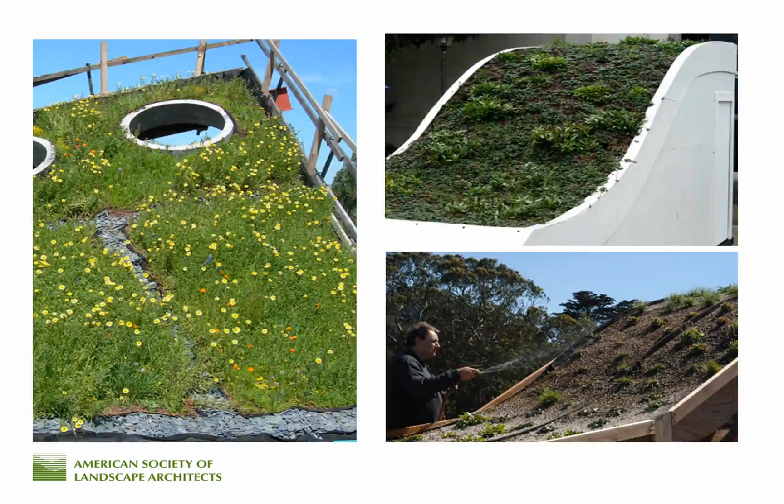California Academy of Sciences with Renzo Piano, we still enjoy a great working relationship with Renzo. We're growing some 7 acres of tea production on commercial buildings in Hangzhou, China. And working with their team is always really a beautiful experience. And Renzo is known for his transparency and his light and architecture.

The California Academy of Sciences had the goal of explaining and exploring the natural world. And they had some 10,000 organisms in the basement in catalogs. And I said, well, wouldn't it be wonderful if we could demonstrate biodiversity and sustainable design and make this as part of the exhibit, the building and the roofs? And Renzo asked me, Paul, can you retain 6 inches of growing media on a curvilinear slip plane in the climate of California? And of course, I walked in and said, okay, yes, we can do that.

And developed some interesting mock-ups, full-scale mock-ups, and this has been a big part of our practice, since we're often asked to do things that haven't been done before. We always put mock-ups into our program and into our design phases, and we learn so much, and the purpose of these mock-ups are really to look for all the ways they can fail. We're not interested in trying to skew these results so that the client can see what great work we do. We're looking for all the things that are left out and all the things that could fail.

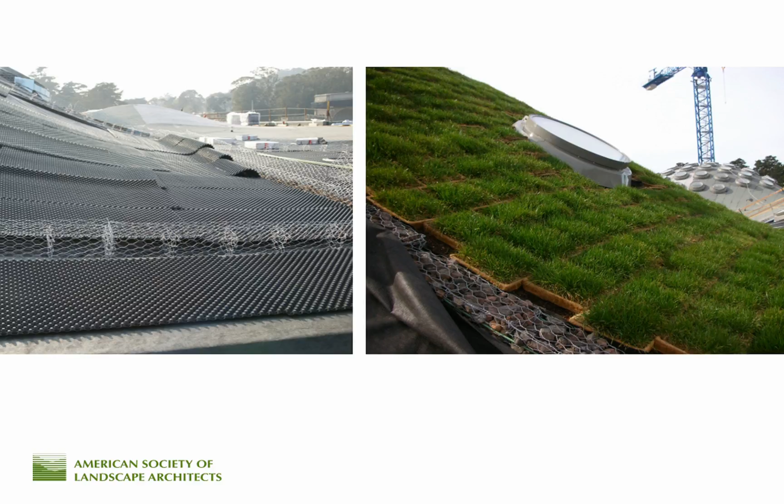But since then, over the last 8 years, the Academy has planted well over 100 species of plants, and the research that's been done indicates there's 86% greater species abundance on the roof than on the ground plane in the park, and 36% of those species aren't found in the park.

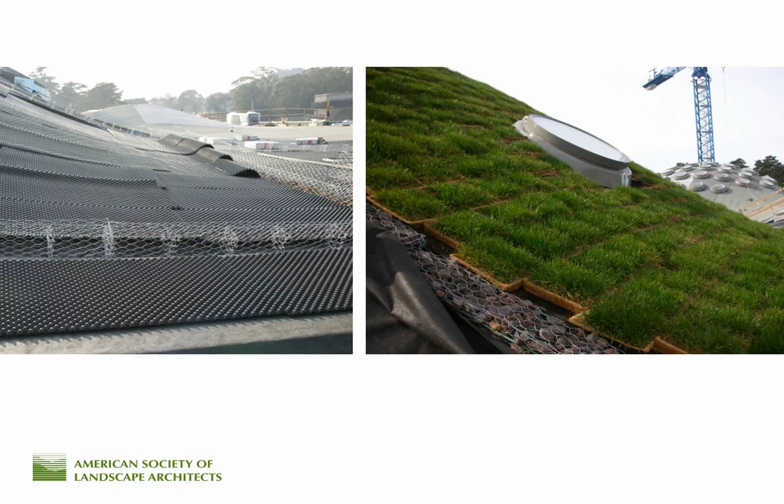So somebody asked me, what good are these little sustainable ecologies within a 500 square mile area? And they're as good as what they're connected to. And this idea of connectivity and looking for adjacent ecologies is really very important to our work. We look at migratory species, we look at hydrology, we look at all those things that can enhance the productivity and the performance of these systems. That's a little bit about who we are.

And Marta, you want to take over again? Sure. And you know what, even though I'm a millennial, I'll let you take care of the clicker.

Our nursery is my love, and we really have grown it to meet the need of our projects, first off. We are growing a lot of plant material for our living roof and our living wall projects, and now for a lot of our commercial and residential work. And the nursery has always been a site of research and testing where we can really understand the plants that we're trying to grow.

And now I would say only 30% of the plants we grow are for our own projects. Through our relationships, we've started to offer our contract growing services to a lot of the contractors and landscape architects that we work with, and we're able to provide, which I think is something that's really necessary in the nursery industry, one grower who can provide all the plants you need on time for a project.

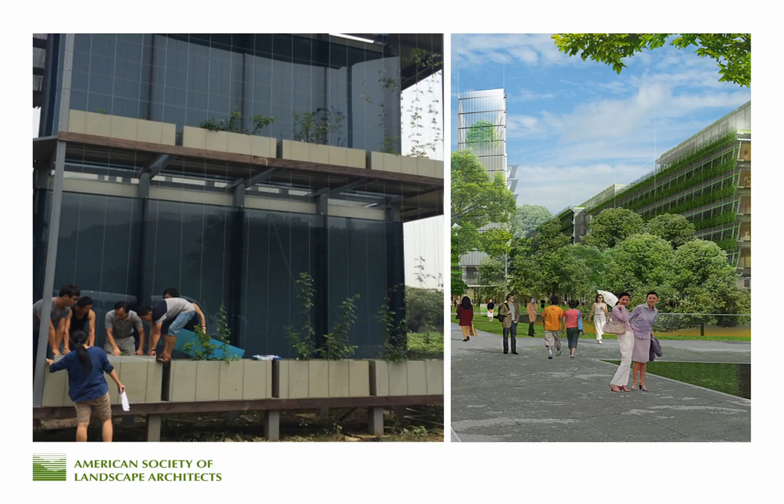Thanks, Paul. Let's see if I can make this work. Yeah, you really have to aim it. Oh, there you go. Oh, that's the wrong way. Wrong way.

This is just more examples of what having the nursery can do for us, and being able to use it as a testing ground. This is a slide of our install crew doing a living wall. And now we're at recent work.

So we're gonna kind of jog through a bunch of projects and talk about the most interesting and exciting parts for us personally. And this one, I think we all really love this project. It's a local project, and it's a really massive project. And we wanted to show this project first because it demonstrates our vertical integration.

So in this particular site, we went from collecting seed, growing plants, planting the plants. We did the whole design, the irrigation design, the planting design, the whole thing. Performance standards, monitoring programs.

So this dam was built in the WPA era. It was built for storing water. It's on the Carmel River, about 25 miles east of the coast. That slide that Paul showed at the beginning of the nice beach scene, that would be the outlet of this river. The Carmel River is a critical habitat for steelhead, and that's an endangered species in California, Oregon, Washington.

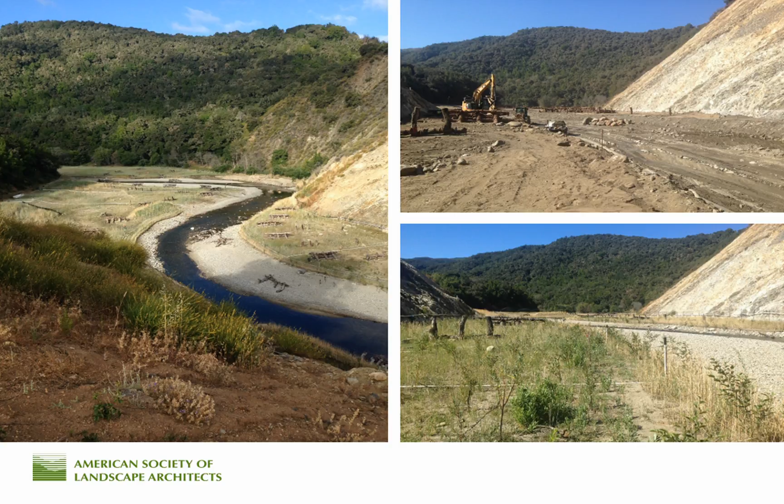And one thing that was a little bit, I'll just move the slides along so we can get some other pictures while I talk. This is nature, it's hard to tell, but nature took over. Yeah, this is a challenge slide.

After we completed the project, or we were getting close to completion, I'm a weather nerd, and we started to hear about what was going to happen in California this year with El Nino. Largest El Nino, potentially the strongest forces, the most warm water in the Pacific. It didn't actually come to fruition, and we're very thankful for that because it could have been a very big challenge.

This was a 1.5-inch storm that came through, and it side cut the river channel, and it's hard to tell when you don't have context, but that's what's happening there. Those were engineered step pools for the steelhead to migrate and resting pools on their way upstream. Most of it remained intact, but it did wash out a whole chunk, so that had to get fixed. And I think as the plants have stabilized, the whole system has stabilized.

Here's a slide of the dam scar. I love this. It was interesting that they chose to leave the dam scar. I'm glad they did. It was sort of controversial, but I liked the reminder of what was. This is a good shot of the step pools before the vegetation is grown in, just allowing the steelhead to come in and rest in the pools and move up. Nice panoramic of it.

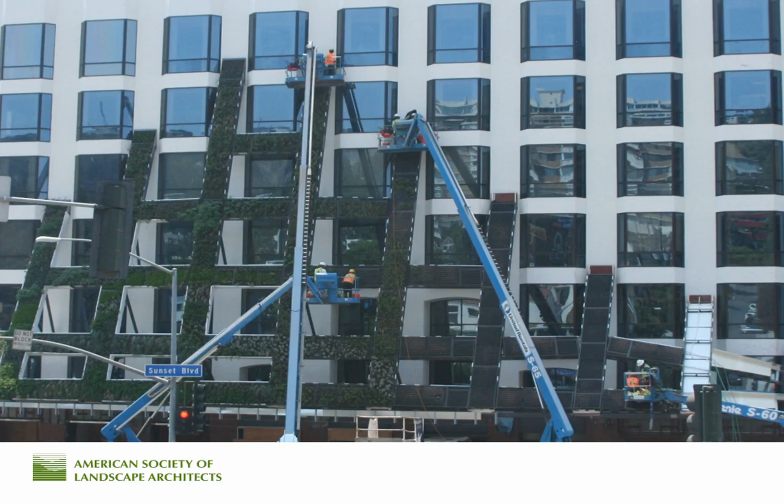These are all guys that work for Rana Creek. They were working 10 to 12-hour days for about 6 days a week. So that's kind of what it looked like after everything had grown in. And we're still currently maintaining it. And the client says, can we change the color of this plant material over here? So we'll go in and tear out some plants and put something else in.

And a real interesting part of this project is the water story also. And Blake worked a lot on that, so I'm going to turn it back over to Blake to talk a little bit about water. Sure, yeah. When Paul and I visited the site, the architects that we were doing the site visit with mentioned that there was some water that might be available that would be non-potable. They were vague, and they weren't even 100% sure what that looked like.

We were in the basement checking out where we'd be putting controllers and equipment, and this pipe you could hear just hanging from the ceiling, just running water, like a 6-inch pipe just gushing water. And we're like, where is that coming from? The building manager provided all the records, and it was 8,000 gallons a day of dewatering water from the basement. So we're like, well, what can we do with this?

And they had an NPDES permit to dump the water. And that kind of raised a red flag for us. It doesn't seem very likely that we could modify the NPDES permit in order to actually use it. We looked through the water scans and the data. It was super clean. It's probably the cleanest water in the LA basin. There's just an underground river running underground there.

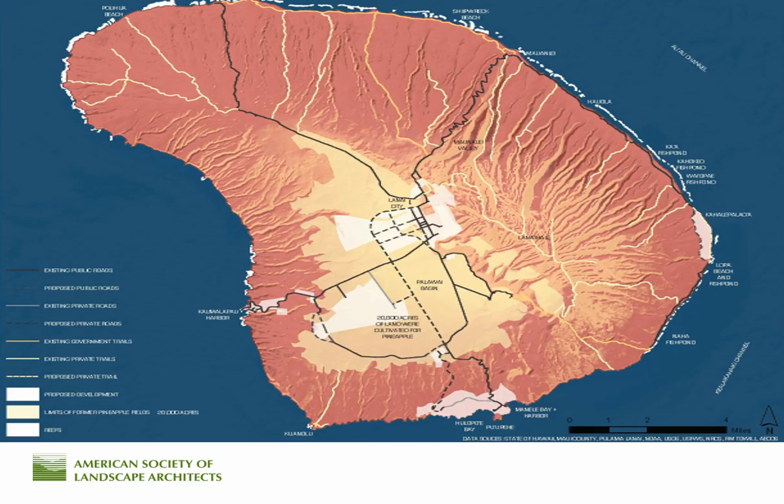There's so much. We flew in one time right after a storm, and the ocean all around the island was just reddish brown for miles out. Yeah, it's destroyed the fishing ponds that were built by the indigenous peoples. The coral reefs, the fishery is in collapse, and it's many factors, the farming, but also the introduction of a deer. Yeah.

So the hydrologic story here is critical to understand, and it is very complex, but I'll try to get to the crux of it. 40% of the water that ends up on the island is actually coming from fog. The Lanai Hale, the little peak there, is where the clouds pass over and condense as fog drip, and there's vegetation up there on the top that is adapted to collect that water. But there are 16 to 30,000 invasive axis deer on the island, and they love munching on all of those ferns and things that catch the water. So that's really where the erosion is terrible.

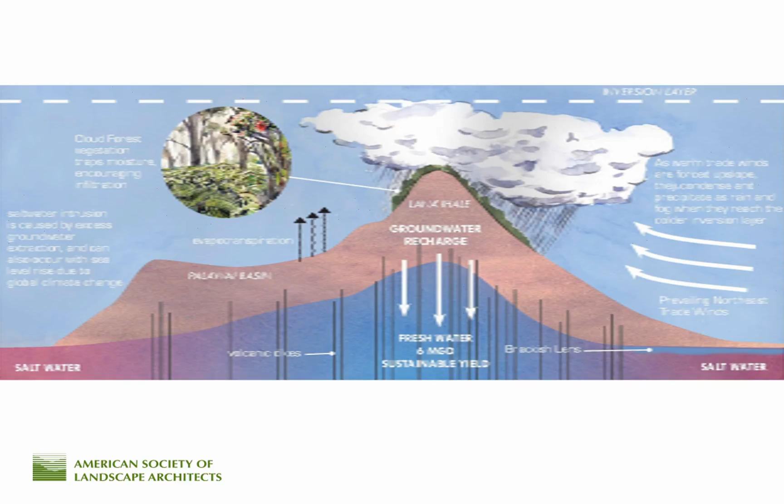And if I can just interject, I think the issue of the deer is incredible. We were looking at herds of 600 deer in one herd. I think there was a population of over 30,000 axis deer, all introduced species, wreaking havoc on a tiny island environment. Yeah, and still are. So management of the deer was one of the initiatives. This is not landscape architecture, but we got ourselves in this position where we had to figure this out. They wanted us to take the lead.

So we talked to the FDA, the different agencies, and the agricultural extension, which was hugely helpful. We had a symposium with them, and they provided a lot of support and made the right connections so that we could develop a plan for a mobile abattoir and a refrigerated truck. The truck drives around with the hunters, and they take down the deer in a humane way that's certified by FDA, hang them up in the pickup truck, and after the night of hunting roll them onto that big van, where the entire breakdown process happens. What you get at the end is delicious meat that could be sold on the island or served at the restaurants, and reduced erosion eventually.

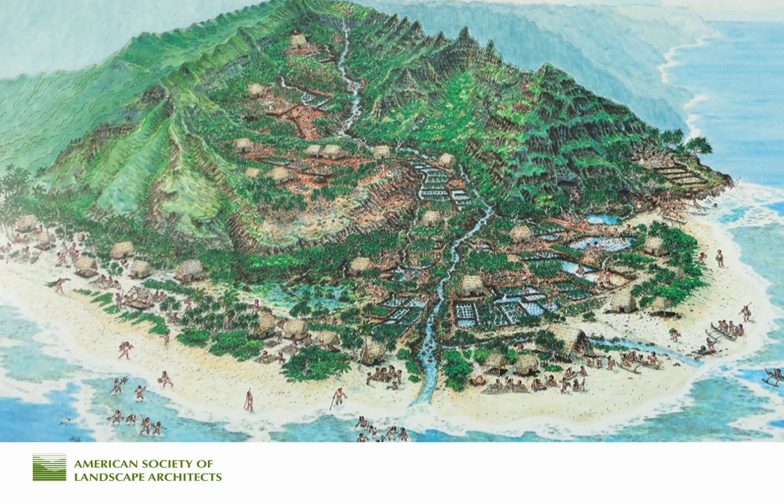I want to interject here for a minute. I know we've got a short period of time, so we'll try to move through this quickly.

The island mainly wanted to be totally sustainable from a food production standpoint.

So one of those concepts was to go look back to historical agriculture on the island, which had a lot to do with agriculture, aquaculture, growing taro, and creating a system where you are using the fish, the poop, and the non-consumed food to provide nutrients for the taro fields.

So we looked into that, and we worked with the agricultural extension to develop a system that kind of does that, and the idea is that this is growing all the greens for the restaurants, and this would be replicable and expandable. And the idea here is we would not only grow fresh vegetables, but also indigenous species for revegetation.

And the metrics here are interesting. There wasn't any financial gain in the fish. The payback, the ROI, was in the fresh food. About $41,000 an acre to the farmers that could participate. And this was critical on an island where 99% of the food was imported.

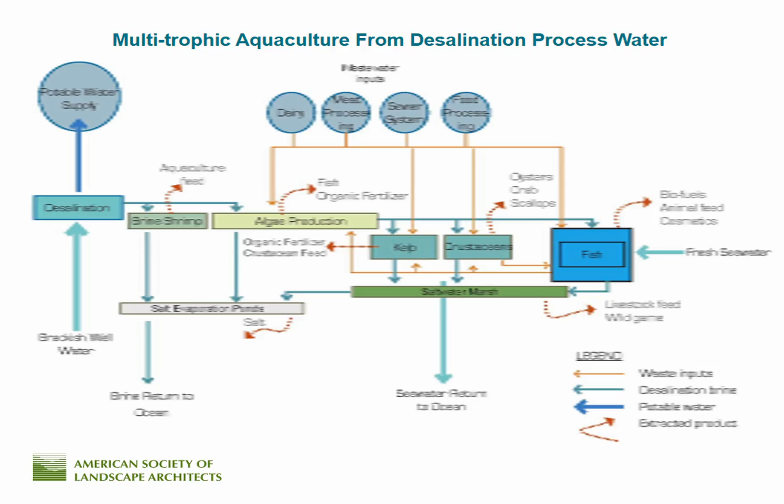We took it a little further with some big idea thinking on how we could take more of the waste stream on the island and apply it to how we could do more. We're accessing a lot of research that the University of Hawaii was putting together, but that's just kind of dreaming.

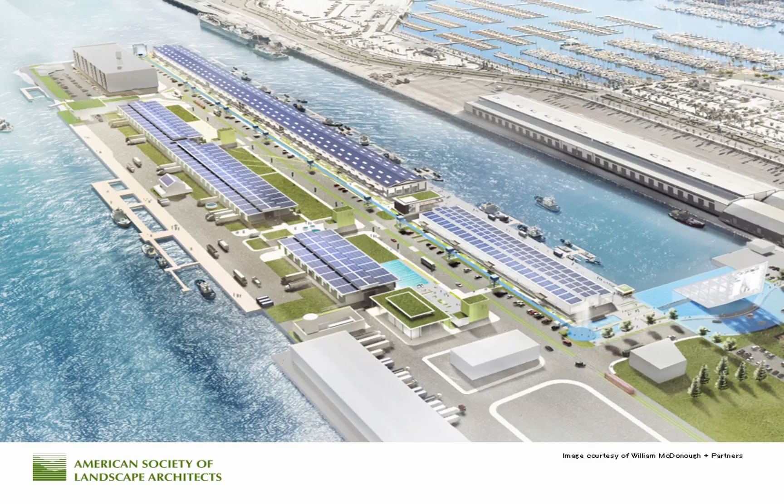Next one. Bill McDonough's project in AltaSea, again, one of those multi-trophic ecological engineering projects, and also looking at adaptive reuse of a historic warehouse and creating a new research facility for 7 campuses in the LA Basin. And 20 campuses. We had the mandate of developing a zero runoff site and high event rainfalls near shore.

And our goal, thinking along the lines of Bill McDonough, was to do more good. So not just get to zero runoff, but what could we do with the water, the wastewater and the stormwater? This is a mile-long pier in San Pedro. Most of that building is an existing building. And it's pretty much where all the bananas were at one time housed and ripened before they shipped out to the rest of the country.

So this whole thing is designed to be a world-class aquarium where people can go and visit and learn about the aquatic life, but also intensive research. All these different schools would be researching here. And what we really focused in on was the water system and how we could take advantage of the nutrient stream from the aquariums and from the rich seawater that was right there being pulled in. The seawater system would be a 1 million gallon a day system. So there was just a ton of nutrients that could come through that.

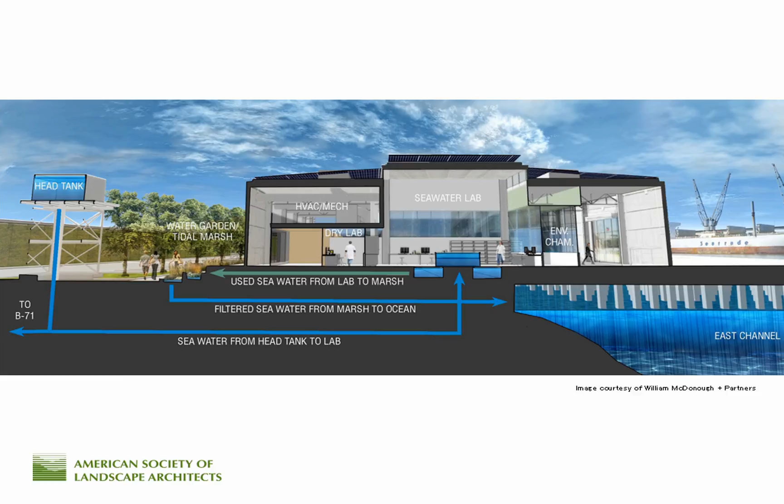And we evaluated whether we would use freshwater marshes or saltwater marshes and integrate them into the landscape. It was a really fun project, master plan level, but really fun to try to figure all this stuff out and work closely with the seawater engineer on how this all could potentially work. These are some diagrams that describe the different ways that we would be entraining those nutrients. We talked about growing

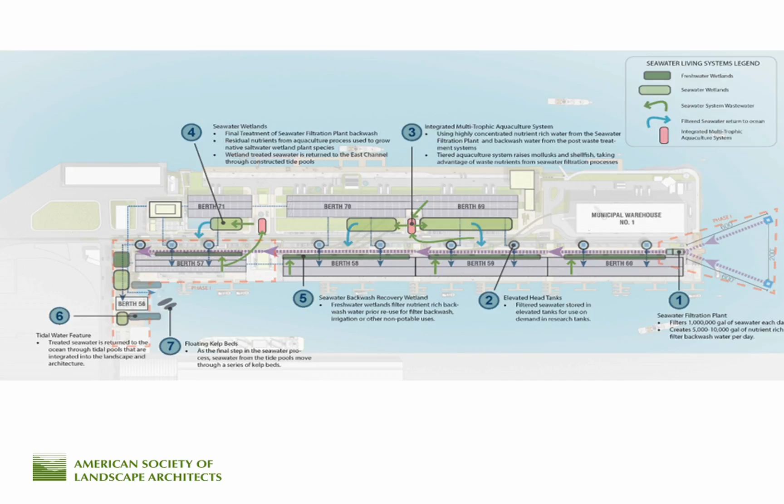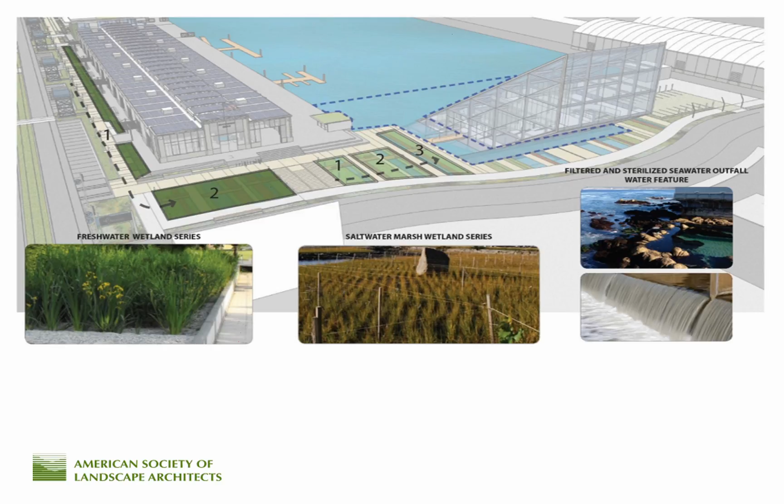mussels on lines, and what was really interesting is that, talking to the researchers, we had a meeting on site with them, and the researchers got really excited about the wetland opportunities, and all of a sudden the program changed. It's like, okay, well, part of this will be demonstration, but a lot of this is actually going to be research, little opportunities for research. So that was a really cool thing that came out of that. More conceptual ideas about how the space would be laid out.

Yeah, I'll just go real quick through this. Just finished a 9-year project with Ken Smith Workshop and Grimshaw in the Bronx, and the big idea here was to take a 3-story hole in the ground that's treating 35 to 40% of the drinking water for Manhattan and integrate it with the existing golf program of Van Cortlandt Park, and also entrain all the stormwater and the runoff from the living roof in circular wetland treatment cells that go around the perimeter, not only to provide the wetland and water treatments, but also to create a secure area so that people don't have access to the plenums on either side. Those are the big vents.

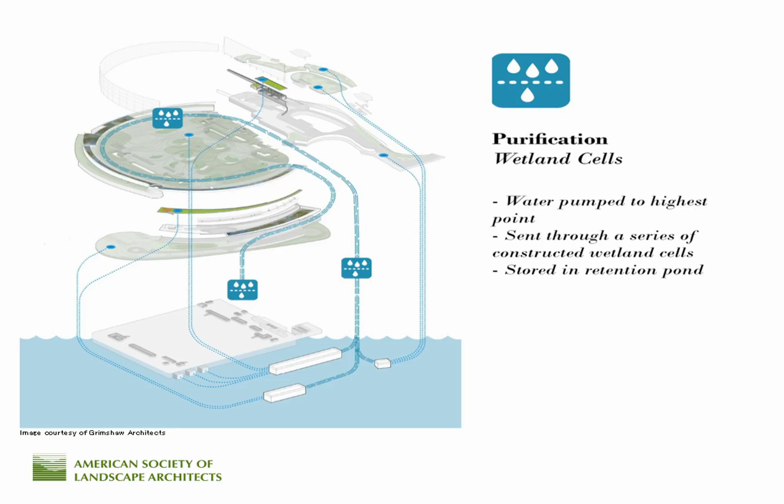And this has been a very complex project and a large-scale project, and when we got into the excavation, we found 4 artesian wells that contributed about 55 gallons a minute with some very high levels of chromium in the water. And so in the wetland cells, we changed the residency time, the treatment type, and isolation cells in order to clean and purify that water. It was material intensive, and one of the hardest things about a project of this scale, I learned, is the schedule, and the time it really can hurt your implementation.

This is the project today, and it's not yet done. There's another phase. There's the green roofs on the ARB plant. That's the chemical plant that takes those chemicals for the water treatment. And we'll go real quick through this project.

Yeah. Maybe we'll, this is the 3M. Blake calls it, it's not the 3 million. The 3M is 3 million tons of steel that they plan on making annually at the plant. It's a huge plant in Saltillo, Mexico. But we kind of changed it to 3M, meaning 3 million cubic meters of soil that were moved in order to build the project.

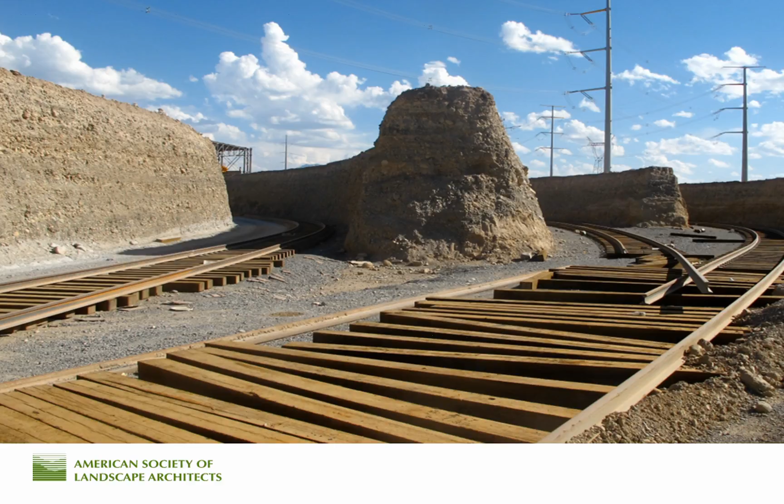It has rail lines that go in. That's the steel being made. The runoff from the rainfall, the civil engineering was just put it in a concrete trench and let it fly. There's absolutely no regulation about this contaminated water with heavy metals. Just run it to the nearest arroyo where there's these ancient villages that are pretty much goat herders, and they're living very poorly on the landscape.

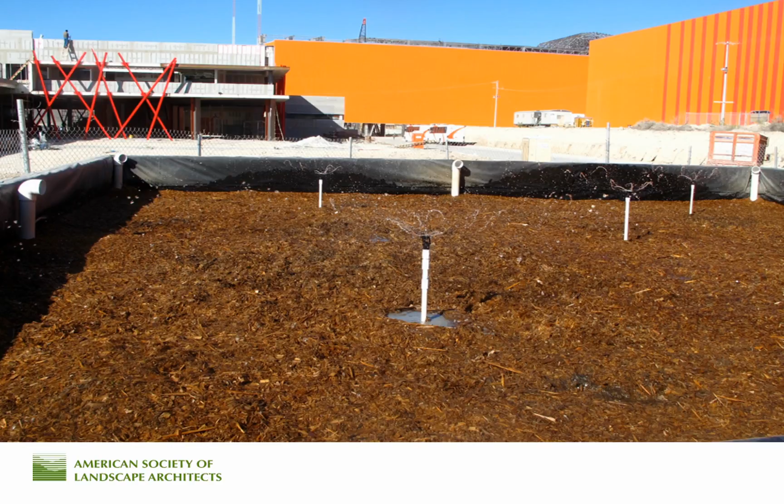And so we talked them into considering treating all that on site, and the big idea was these pools that occur naturally, and looking at that ecology as the water treatment scheme. And we also did the landscape for the headquarters, but used zero potable water. This is all treated wastewater, black water. These are pretty much off the shelf. There's no big fear and loathing about using these open composting wastewater applications there, and created these nice little oases in the desert for the project.

Sina, I want him to speak because he's been really instrumental in a lot of the vision and illustrations for our projects, and how we take complex ideas about enhancing building performance with landscape and vegetation and ecology. And then we'll get into some questions and discussions.

So, first of all, my name is Sina. One of the reasons I haven't spoken very much today is because I'm one of the most recent members of our team. I've only been working at Rana Creek for 3 years after receiving my MLA at Cal Poly Pomona. And one of the reasons that we decided that would be good for me to be part of this discussion was to give the perspective of someone who is more recent to the profession and who is still kind of learning as I go, and seeing some faces in the crowd, I think that that was probably a good idea, because being part of Rana Creek has been a wonderful experience for me to learn from some of the projects that we've gone over.

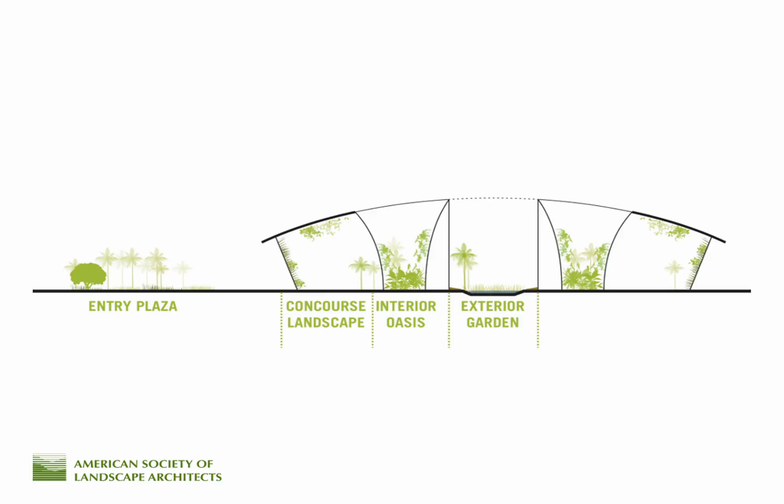So for this project, there were 4 different components. There was the entry plaza, which the main purpose of was to provide an agricultural, sustainable source of food, and also to block wind and sand from the surrounding desert. The concourse landscape, an interior oasis, which was basically a heavily conditioned, almost greenhouse type space, and exterior gardens, which were similar to the entry plaza. The concourse landscape was supposed to be a subset of the species that you would find in the interior oasis, which was intended to be a much more rich, lush landscape.

There were a few challenges in this project, and one of them was that we didn't really control the design. That wasn't part of our scope. We were trying to figure out what the architects wanted without actually being able to propose specific design ideas. So as much as possible, we tried to give them a framework for making decisions and giving them a sense of what the options were. This shows the interior oases, and this graphic shows the entire system at work. Another challenge with this project was just adapting to the architect's style. We worked with Perkins and Will, and they were very talented people. I learned a lot from them and from this project.

But, for example, they had this specific graphic style where they wanted to show everything in one graphic, and it was kind of difficult to adapt to that personally. But I think the nice thing about this graphic is it shows how complex this project was and how interconnected

everything was. So for example, on the far left, you have the productive landscape providing food to the airport, and also landscape waste that is then fed into an anaerobic digester. That in turn produces compost, which goes back to the exterior landscape. And then you have connections between the interior landscape and the exterior gardens.

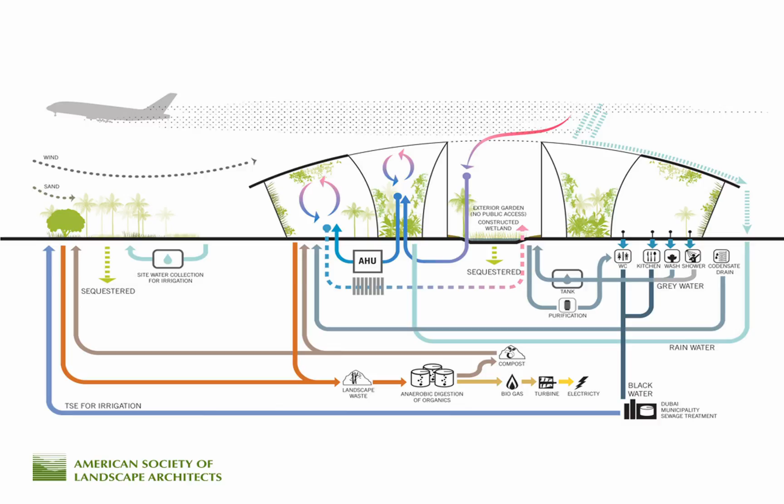So you have air handling units and cooling towers, and the water going from the cooling tower wastewater to the constructed wetland in the exterior gardens. So there's just a lot of stuff working together.

In terms of the productive landscape, we really looked at the history of the region, the cultural landscapes that you would find in the Arabian Peninsula, and we were really drawn to the ideas of intercropping, of using native species that have deep root systems and can access water deep in the ground,

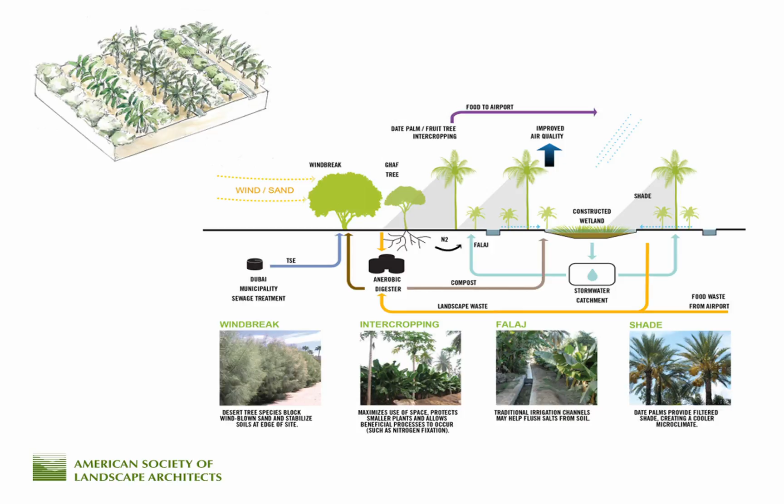and of also using these traditional irrigation channels called falaj, which in our case we thought would maybe not be so much used for irrigation, but maybe used to periodically flush out salts that came from drip irrigation. So we were really trying to use as many old ideas and cultural traditions in our design as possible.

I think one challenge with that, though, was that as landscape architects, we're often inherently drawn to place and to history and to what has come before. And I think for me specifically, it's always challenging to push the boundary and tear myself away from tradition and culture, and envision new possibilities.

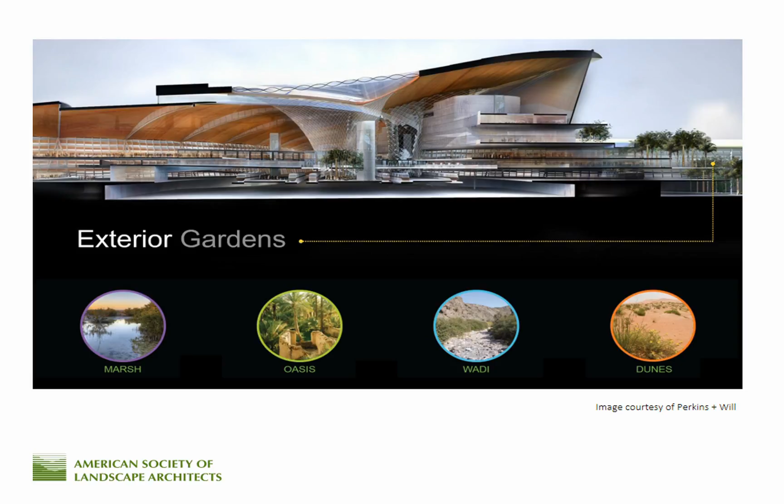So this was a good exercise in doing that, and not just trying to recreate a cultural landscape, but also trying to see how that could be adapted to this specific setting. So the exterior gardens were more intended to be, as I said, low resource landscapes. So we looked at some of the existing landscape typologies in the region.

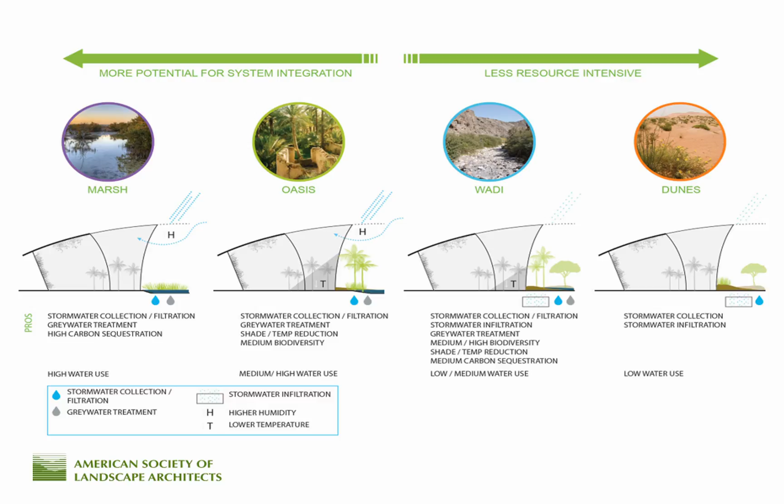One of the drawbacks of this project was that we never had an opportunity to visit the site, and oftentimes we were designing from images and PDFs and trying to imagine what these places would look like. Years later, I did have a chance to visit the region on my own, and it was really interesting to see these plants and landscapes that I had read about and studied. I really felt like I had entered this project, and it was interesting to figure out that we were on the right track in many ways.

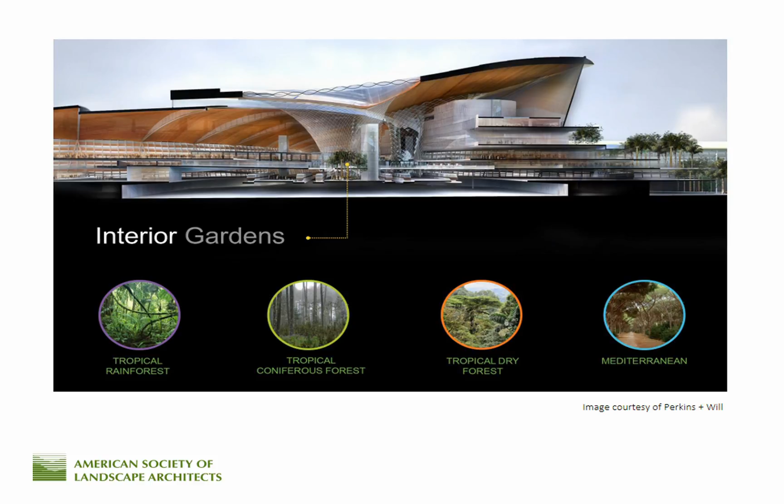The interior gardens were intended to be much more lush. We looked at a number of different biomes from across the world. And since this is an international space, we really wanted to pull as much from these different biomes so that we could create a truly international interior landscape. Again, we tried to communicate to them the different benefits of each biome typology in terms of system integration and resource use.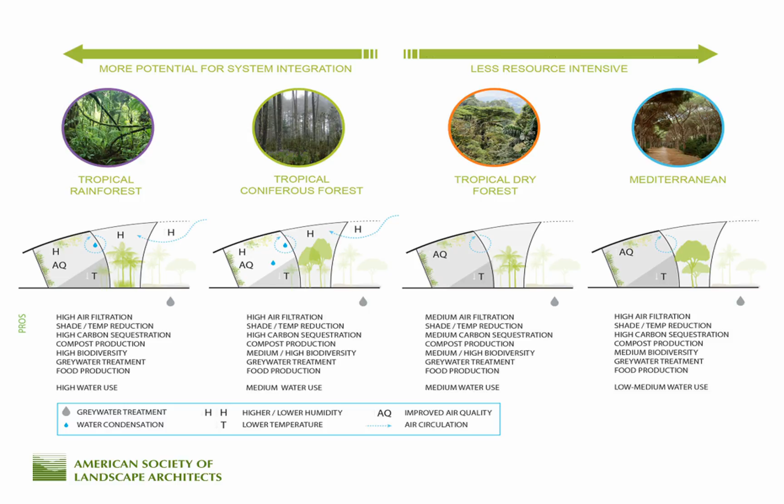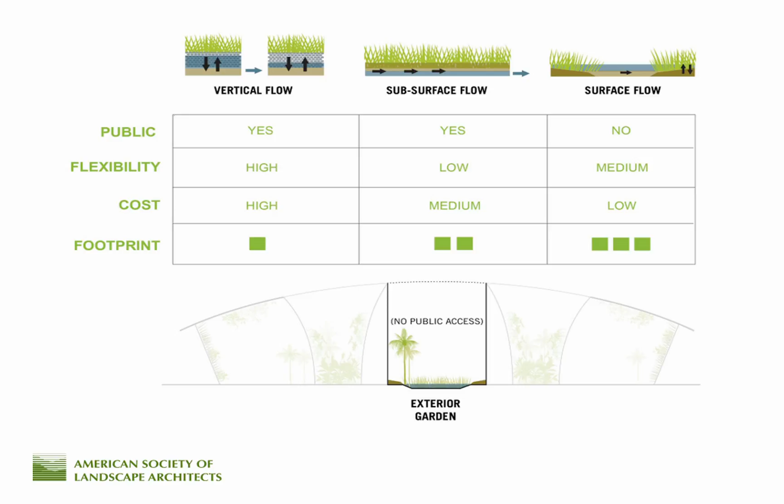And we did the same with the potential for using gray water and even black water in a constructed wetland. There are several different types of constructed wetland, and we just tried to synthesize the information as much as possible in an easy to understand manner so that they could make decisions about exactly what they wanted.

Oh, sorry. Yeah, what's next?

I think that you can see the broad depth of applications in our work and our passion and love for the work and history of the company. And I was really happy you all got to hear from these remarkable people today, whom I have the great pleasure of being with every single day. And I think one of the things that really sets our small firm apart is the love of what we do, and how well we get along with each other.

There are couples, there are generations, fathers, sons, mothers, daughters. We're a big family, and we are really dedicated to the work. We see great opportunities in the future. We're positive about the direction that the profession is heading and the integration of landscape ecology and restoration ecology into the work we do.